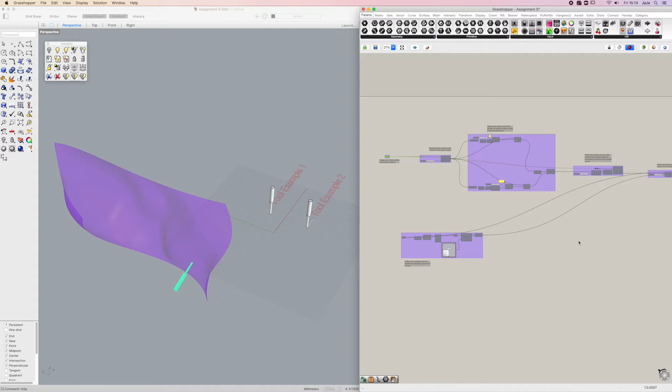If I want to show you very quickly here, this is our freeform surface that I just modeled in Rhino. I can show you, for example, you can always change it. Let's say if this is the surface you want to work with and you're satisfied, then you can always edit it, hide it. This is your design.

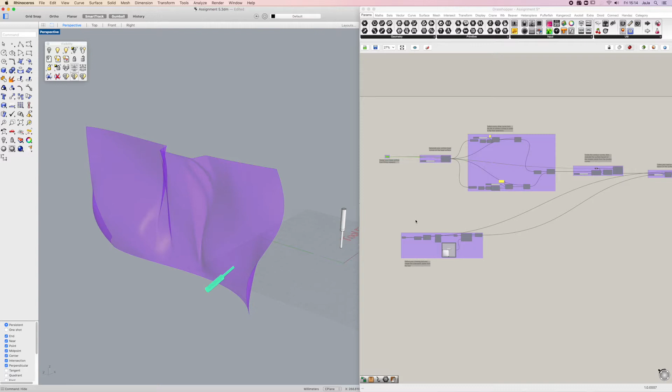And here we have also another component that we call the tool. It's a geometry that is also made in Rhino separately. You use that in order to produce the shape you want. In this case, the drawing you want on the surface.

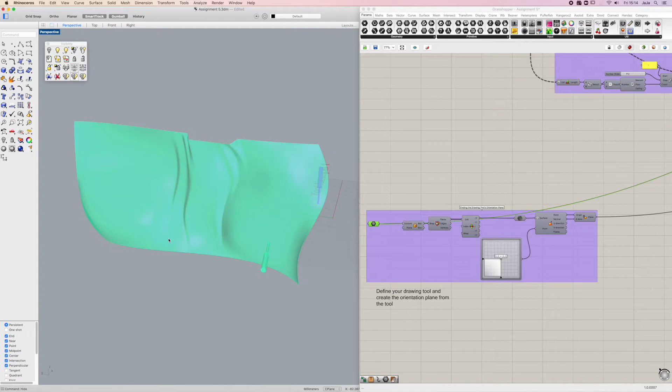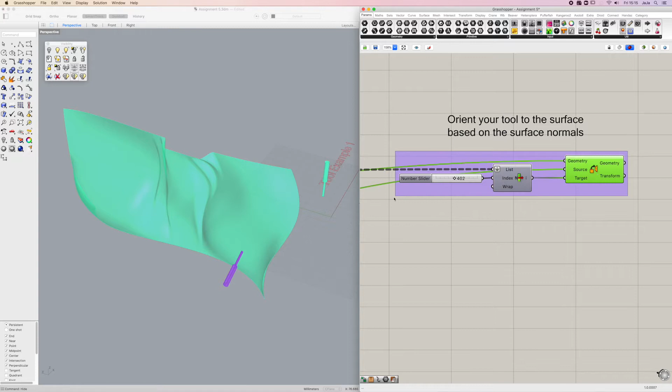We are going to talk about a new component that you're going to learn from this assignment. It's called Orient. Orient is a command in Grasshopper that we use to change the orientation of a geometry or a shape according to a reference plane. So we give the source plane, which is a plane on the tool, and we reorient it into a new location and a new direction based on a given target plane.

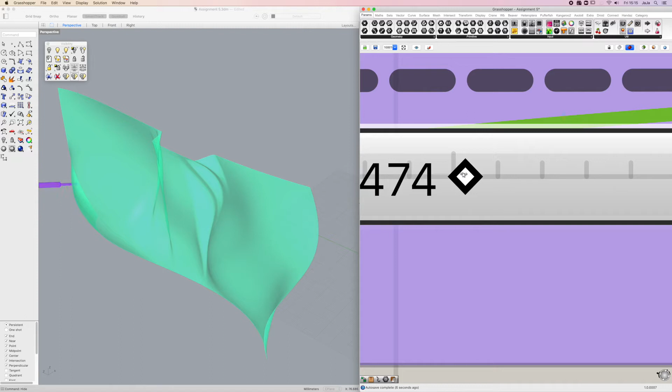That way we can actually start creating that effect of drawing on the surface. If I zoom in here, I have a slider which I can move, and you see that with the slider I'm actually moving our tool on the surface as if it's going to draw the horizontal lines on the surface.

So the step by step to get here, you have to understand that we will have an initial surface and we will have to create the lines that we want to draw based on. Then we extract the points and the planes from those curves on the surface, and we use those planes as a reference for guiding our tool on the surface.

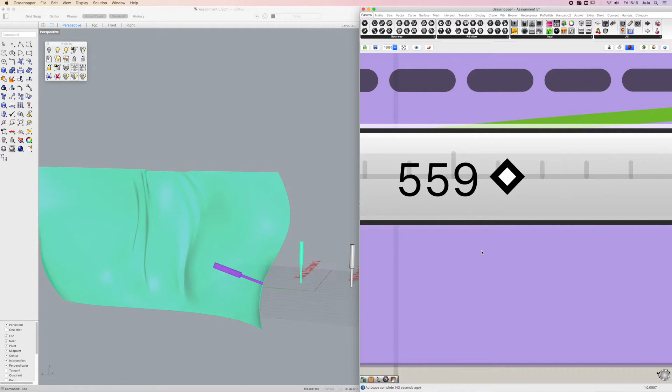Later, this will be the frames and the planes that you give to the robot to move around, and based on the dimensions that you have defined for your tool, you can produce your design.

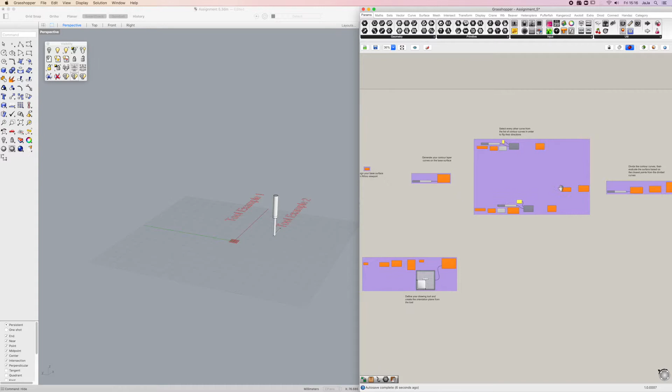So I'm going to open up the file that I have uploaded on the wiki. Here all the wires from the components are disconnected, and that's on purpose, of course. I'm going to explain how we have to use the components in order to create an assignment.

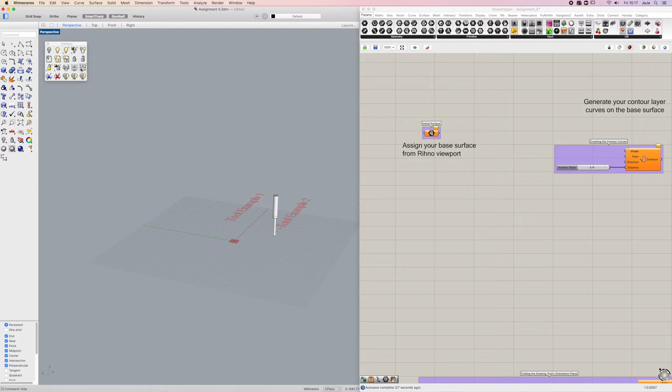So first of all, we need our initial surface, which is the design that you have, for example that freeform surface. I have it hidden in Rhino, so I just have to press it to bring it back. I also have my tool here.

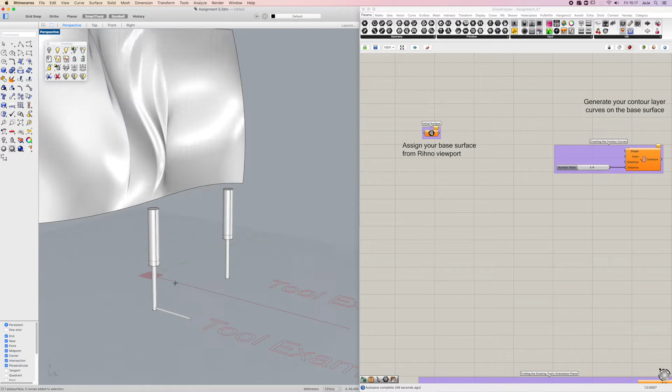So I want to start with the first tool, and then I also have another tool example intentionally to also explain how different shapes of tools require different orientation planes and reference planes that you can use on the surface. Imagine if this tool is a straight axial tool, which could be like a

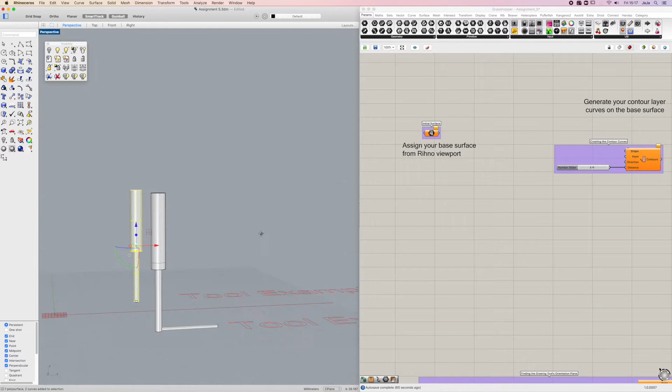marker or a milling bit. You would have one reference plane that has one vertical, for example, orientation in the Z direction, the normal direction. But whereas on the second tool, you will see that it looks like an L. So the shape is actually changing here with the orientation, and we will have to give a different plane as the reference, which would have a different direction of the normal plane.

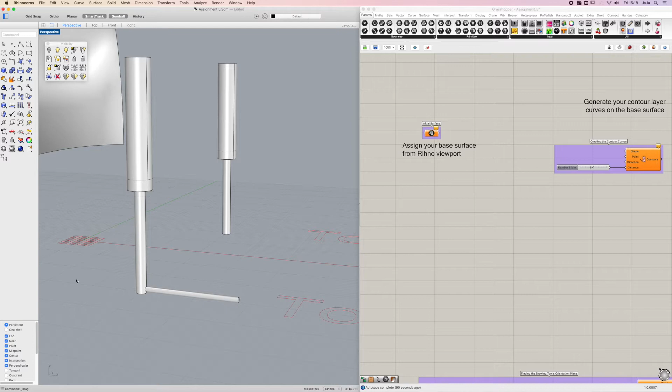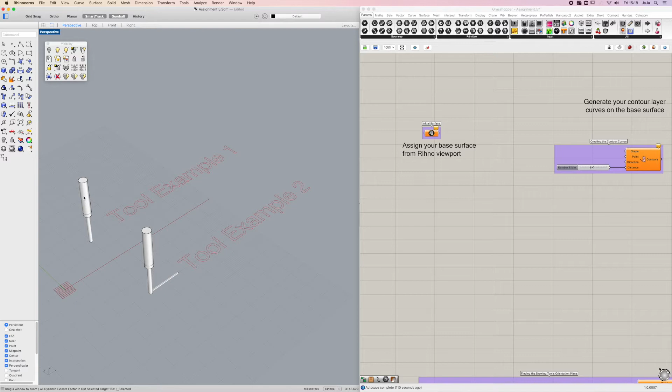Instead of vertical, you would see that it will be horizontal. I'm going to go further and explain later, then you will see the difference between these types of tools as examples. And we know that there are countless different tools and end effectors that later we have, and we have to find out what are those tools as reference planes that we have to use in order to define for the robot.

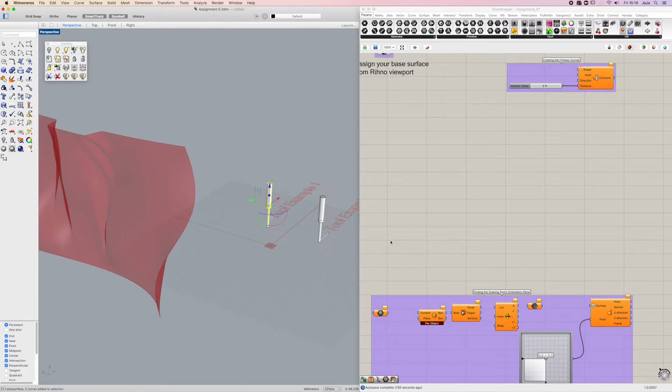I assign it from the Rhino to Grasshopper. That's the first step, of course. The second step is that I want to define my tool, which in this group of components here, I can assign my tool into the geometry component.

So after defining the tool in Grasshopper, it's very important to find the tool's orientation plane. And that's what we're doing here. I'm going to do it separately, up here, so you can actually follow.

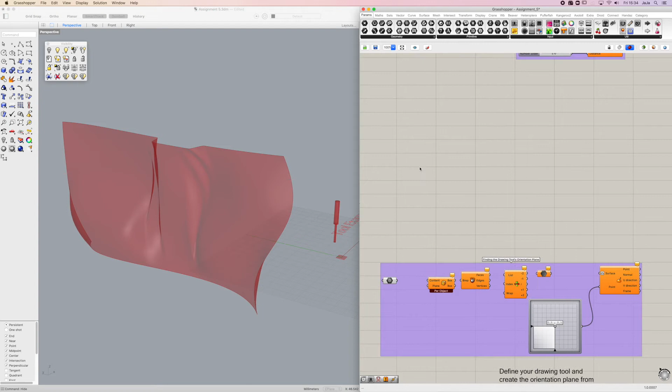I'm going to extract the plane, the reference plane, from the tip of the tool. And if you pay attention, the tip of the tool is some horizontal surface. And I will end up with a type of plane that will give me a vertical normal from that surface.

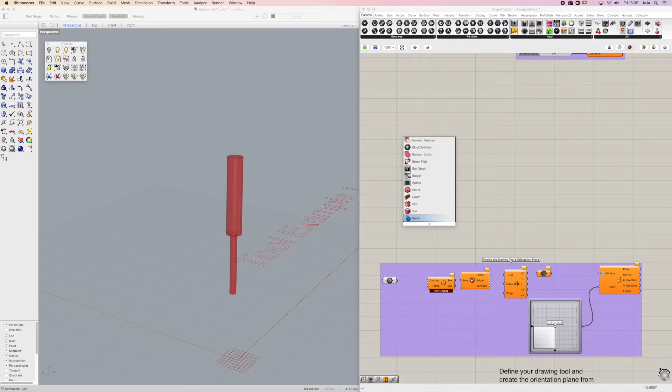One way to do it is that if I create a box around my tool with bounding box, and explode my box into single surfaces. To do that, I can use deconstruct brep, and I would end up with having a box with multiple faces, exploded into multiple faces, lines, and vertices, which are the points.

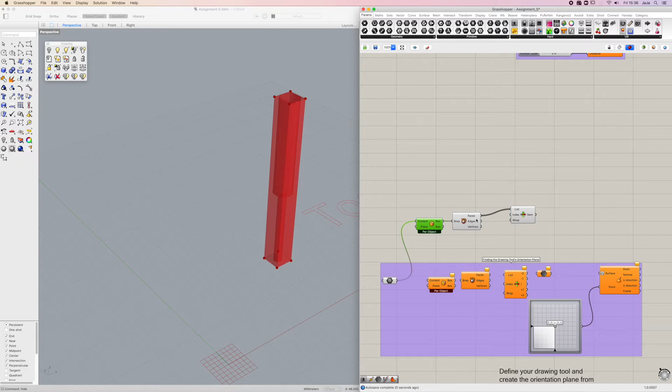I know that I would end up with 6 surfaces, and I have to just select which one of those surfaces will be the bottom one. So I would find that specific item number index from the list of 6 surfaces. I can preview this off so that I know the first surface is the one that we don't need. So I'm gonna make a slider from 0 to 6 to look for it.

And it will be surface number 4. This is the surface that we want to work with, to extract the parameters such as plane and center point, etc.

It's very important to know that we want the center point of this surface to extract the plane from, because we want to find the center point from the tool mathematically. So I would use that surface to evaluate a certain point on it and use the frame out of it.

This is exactly the same as the previous assignment. If you've done it, we use evaluate surface. It gives us the point, the normal direction, UV directions of the surface, and a frame, which will be the plane that we would use as a reference here.

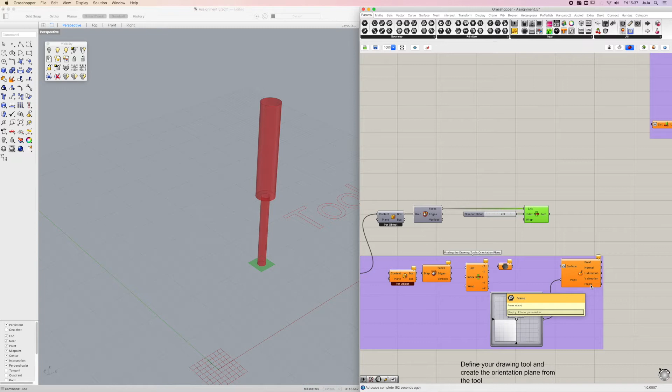So I will make sure to reparameterize the input for the surface, because reparameterize, as I also explained before in the older tutorials, would create a domain on the surface from 0 to 1.

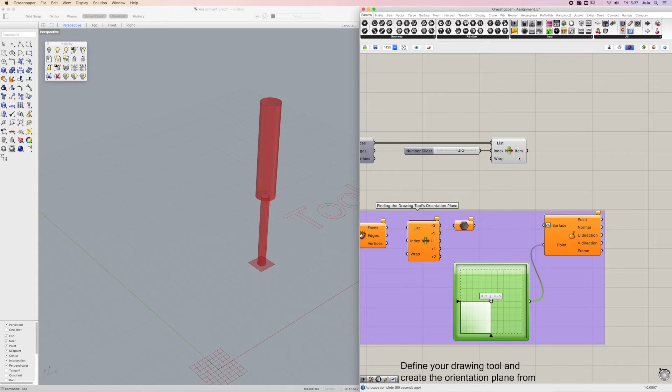And then we can use this multi-dimensional slider to select which area, which point we want to select on the surface. So if I just connect these surfaces on the evaluate, then you will see that it's automatically selecting the center point, because we are having 0.5, 0.5.

If I put it on 0, 0, you know that it will go to the corner, first corner on the bottom. If I put it on 1, 1, it will go to the other side of the corner. So it's basically clear, the direct correlation between the multi-dimensional slider and the point evaluation on the surface.

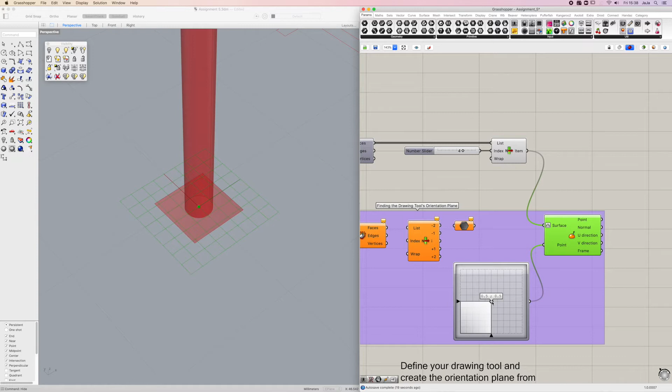So I'll put it on 0.5, 0.5, center point. That will be our tool center point, basically. And the frame that I want to extract will be this plane that you will also see here. That will be the first, the reference point for our tool.

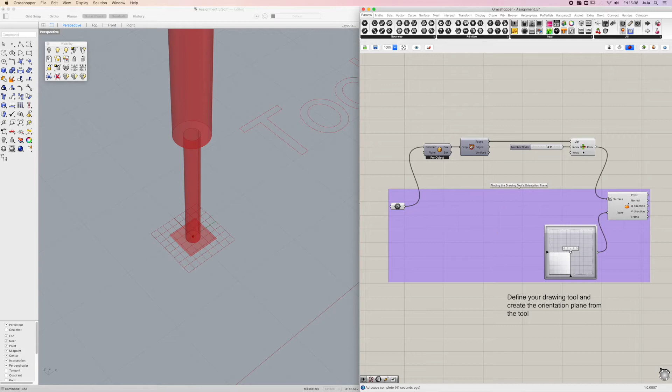So basically, these are why I had these components here. I can delete them and replace them with these ones. So this is defining the tool and the reference point, the reference plane.

Now I go back to my surface again, and this time I'm gonna draw the lines on the surface. I use a contour. It's a command in Grasshopper that allows us to draw horizontal lines, parallel lines, on a certain shape according to a direction.

And the lines distance between them could be also predefined as a different parameter here, as you see, for example, number 5, in order to control the number of lines we want.

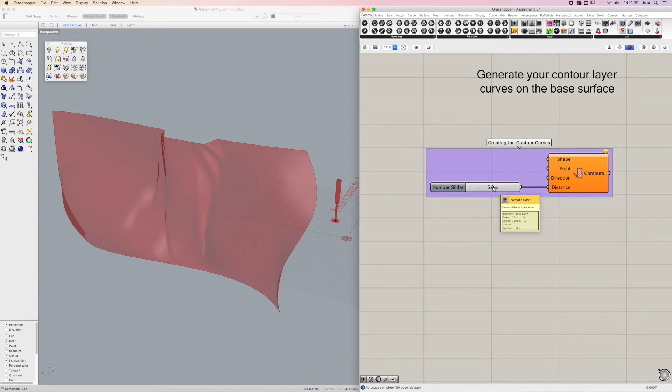I type contour, C-O-N, contour. It creates contour curves. This is also the same command that exists in Rhino as well. But here in Grasshopper, you can just control it parametrically. So I connect my shape to the surface.

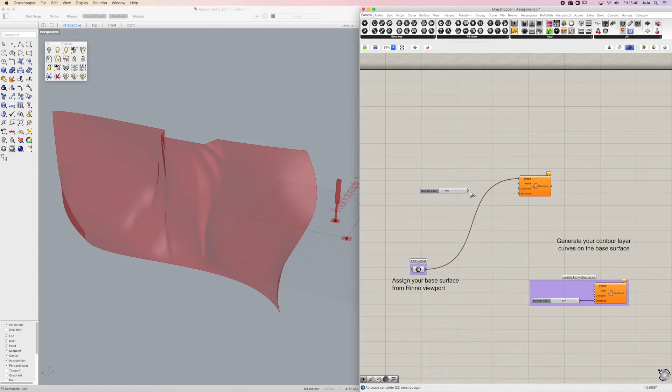Then the direction, I can always define any direction I want, but in this case, the direction is just a z vector because it's 0, 0, 1, so it goes on the z direction upwards. And the distance, I want my curves to be made from distances of 2 millimeters. So I just give them 2.

And then you'll immediately see that there is a bunch of curves, a series of curves made on the surface. If I change 2 to 3, I would end up with less curves because the distances are more, and therefore will be less curves fitting on the surface.

So the output from the contour will be 39 curves.

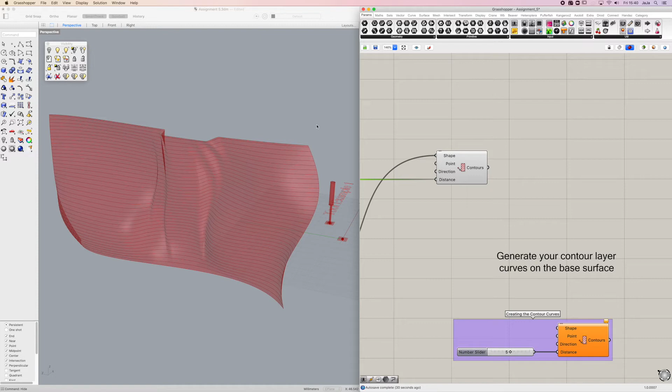I want to make sure that all these curves are following the same direction. For example, the first curve starts from the left to the right, then from the right to the left. The second one follows the same direction, and so on. So all of them have the same directionality, which we have to consider if we want our tool to follow a certain direction.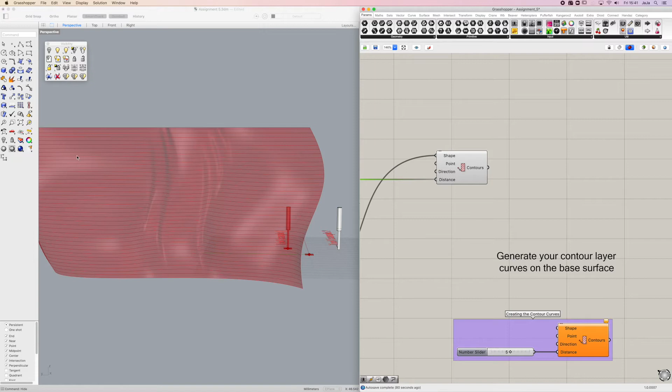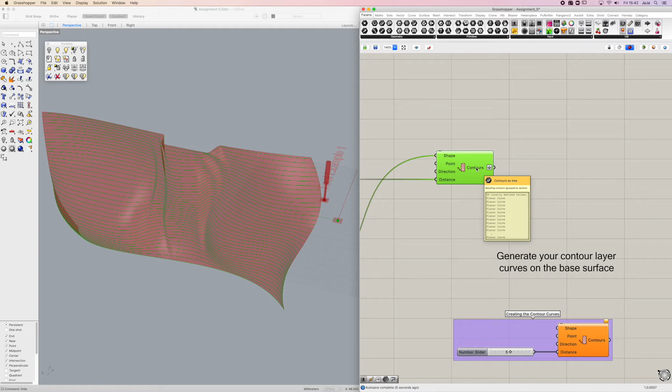So to do that, we have to select every other curve on the surface and flip the directions of those curves, so that the first curve, if it's from right to left, the second curve is from left to right, and the third curve is again right to left, and so on. I'll make sure I flatten this so that I have all of my curves into one list. Then I'm going to select every other curve and flip the direction. That's what we have done here. We will do it here.

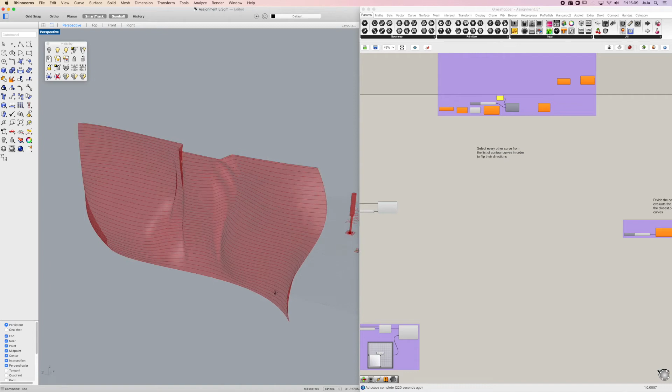I'm going to do it separately so it will be more clear and understandable. I would delete all the in-between components to make it more clear and open space. I want to select every other of these curves and flip their direction in order to actually have the tool going in one direction and at the end going back.

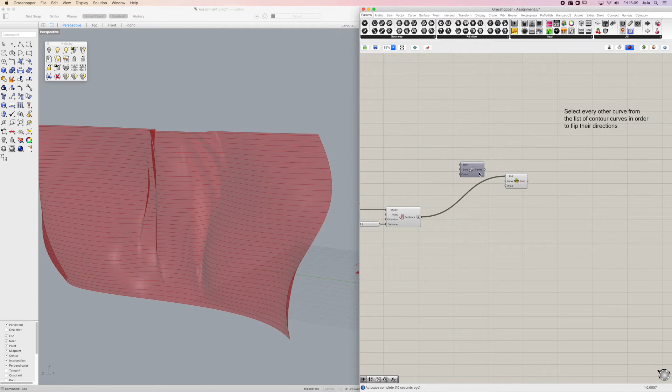To start selecting every other curve to flip the direction, I'm going to use List Item, and I want to make sure that first my data tree is flattened so I have all the items in one list. I connect it to the List Item, and it selects the first one for me because by default the index is 0. But I want to give it a series of numbers, and within this series I'm going to give indications of where I'm going to start and what steps I'm going to take in terms of selection and how many items I should go for.

So it's very important to know how many curves we have in the list first, and to define these inputs for the series. If I already connect the series to the list, it would just select the first 10 for me, because by default it starts from 0, goes in steps of 1, and reaches number 10.

One thing: if you want to start selecting your curves in this direction, List Item works in a way that if you keep going and pass the last number, it starts again from the bottom, and we want to prevent that because we only want to select these curves once. So I want to make sure I wrap the item list, because then all the items will be reached just once and it does not go back in a loop.

So for starting, I'm going to start from 0, and the steps should be 2 because I'm going to skip every other curve. If I select it already, you'll see that it skips every curve.

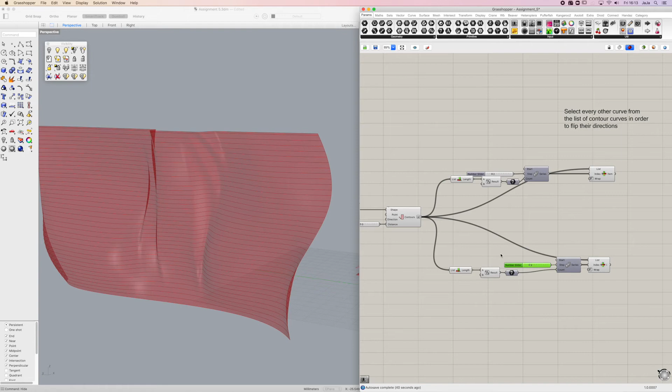In order to do that, I have to make sure that I don't start from 0. This time I would start my number series from 1, and I'll keep the step number again as 2, and give it a count for how many times this has to be selected. But you'll get an error here because it says supplied index too high. We want to wrap this, but there are more items requested than available in the list, so it's unable to provide that number. We had 20 items here as input, which adds up to 40, and that's bigger than 39, the number of available items in the list. Therefore 20 is too big.

We have to make sure that we are actually one less than 20, which is 19. So I subtract 1 from 20 and end up with 19, which can be used as the count. Then it's possible to extract the other set of curves in between. So now I have two sets of curves, and I'm going to use one of them to flip the direction of the curve. This happens by just connecting the output to the curve here. And once I have all my curves flipped...

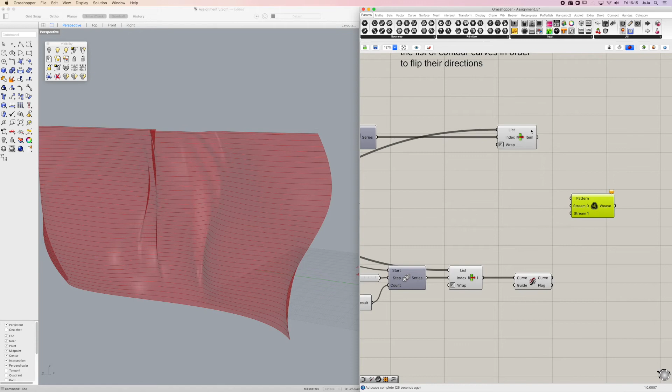Then I'll have to again make the same list with all of my curves in it. For that I will use Weave, this component, also explained before. Weave allows us to mix two lists of items based on a given pattern. Here the pattern is 0, 1, meaning if I give the first list to stream 0 and the second list to stream 1, it will weave them based on these patterns combined together. So the outcome should be a list of 39 curves again, but this time every other curve has been flipped.

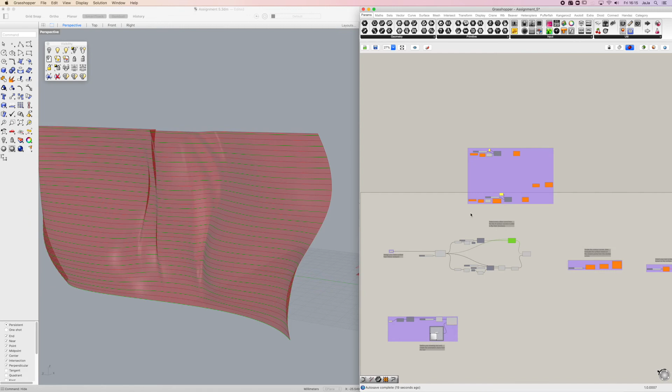This is what we've also set up for you guys here to do.

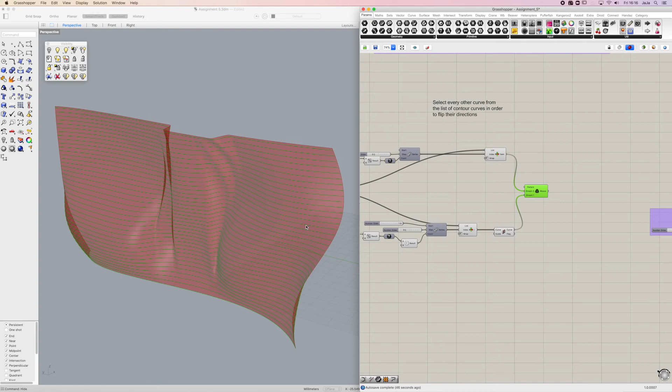So the output curves here, I'm going to use them to extract the planes and frames from these curves on the surface. We'll use again the same components as before, the Evaluate Surface and Extract Planes, and then we can use those planes as targets for the tool.

But before that, we have to know at which locations we want those. We want those locations to be on our curves, because we're going to draw these curves on the surface. So here is the set of components that will give that to us. I'm going to move it away so that I can explain it separately.

I want to divide the curves, and I want to divide them by length. So I have to specify what the distance will be, for example 3 millimeters. Then I'll get the points on the curves.

If you check the list structure, the data tree structure, you'll see there are 39 branches of data representing the number of curves, and each curve is subdivided by a number of points based on a given length, which is 3 millimeters. So every 3 millimeters there's a point, and that gives us, on every curve, how many points you will have, which is the number of items in each list, in each branch.

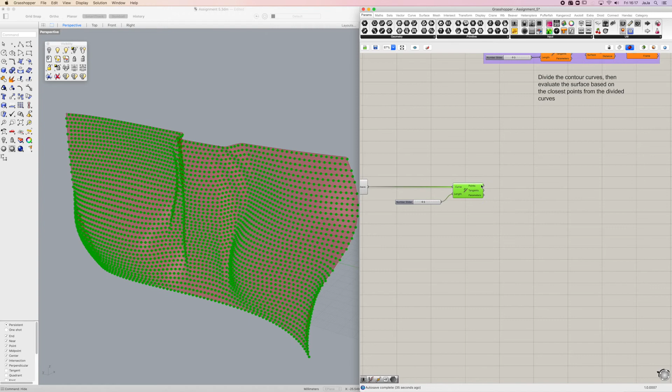So I want to find the locations of these points, which are on the curves, but this time on the surface. So I have to evaluate my surface at these points to be able to extract the frames we need. But if I just connect the initial surface here and give it these points, it would not give us anything, because these points don't yet exist on the surface. They are points on the curves that we divided.

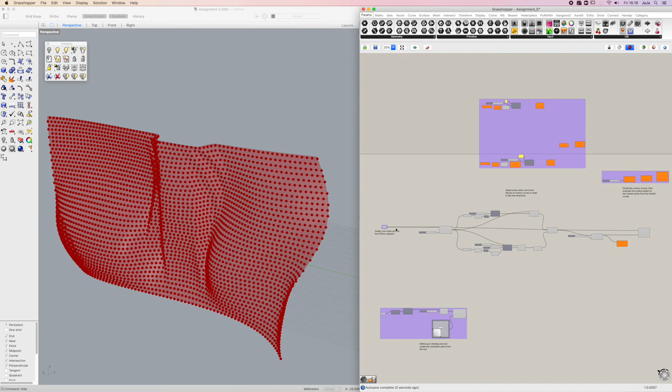So we have to make sure our points are also on the surface before we evaluate their locations from the surface. We have to use a component called Surface Closest Point, to be able to project these points onto the surface. I can use again the same input from the surface we had, and in this component we make sure that all of these points now actually exist on our surface.

So I will just unpreview the subdivided points on the curves, and here I have three outputs: the exact points on the surface, their distances from the initial points we gave them, and then the UV coordinates of the points on the surface.

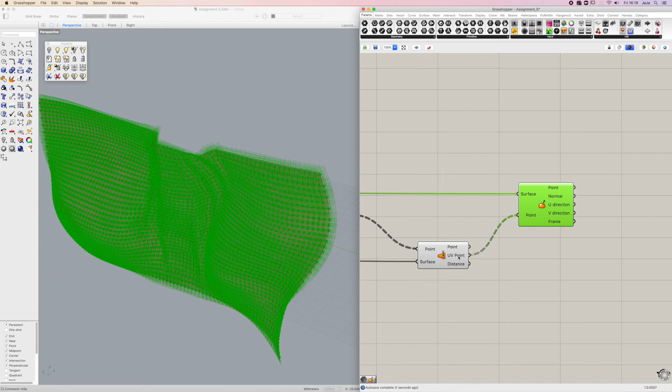This is what we want to use as the input point here, because we want to make sure what the UV coordinates are that we want to evaluate on the surface. If I give this input here, I would end up having my surface evaluated at these certain locations.

Now I can use the frame on every location as a guiding and target frame for the tool. That's what happens in the last part.

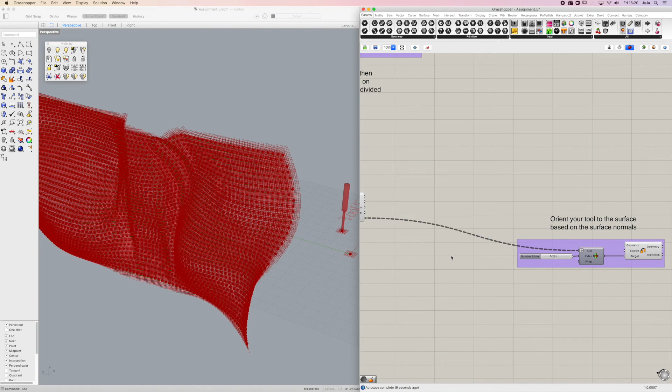So if I connect my frames to the list here, which is the list item, I can select which specific plane I want to showcase, to show the tool on the surface at which specific plane, and then use these planes as a target to orient my tool.

So I have the information from my tool over here, which is the source plane from the frame evaluated on the tool. I connect it here as a source, and then the geometry to evaluate and orient, and that geometry is the tool that we created in the start.

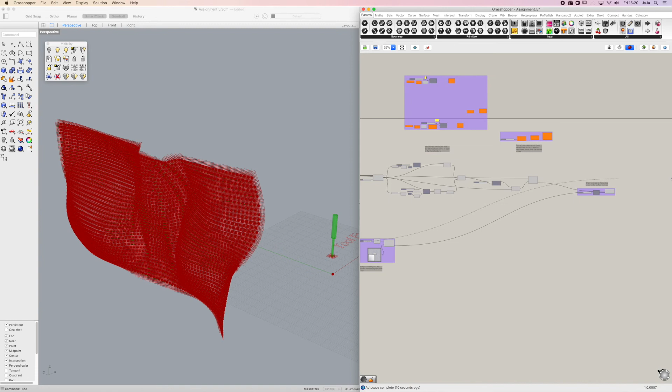So when I do that, if I select the orient component, it gives me the geometry, which is my tool, but this time oriented on the surface. This orientation is based on these guiding planes on the surface that we created over here.

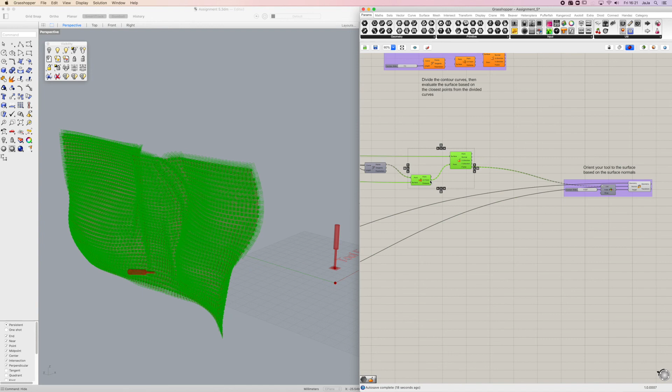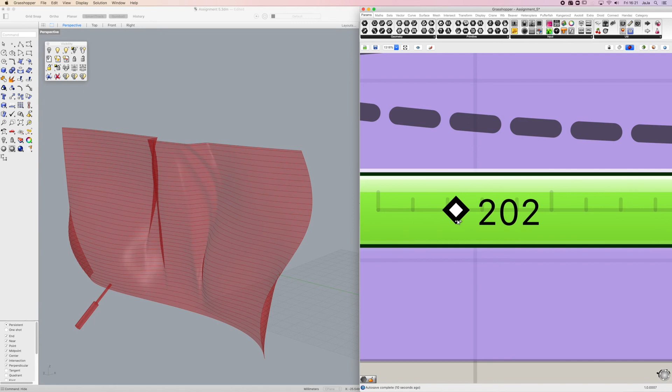I can preview these off, so then I will see my surface. With this list item and the slider, I can select at which specific location of my tool. If I just give it from 0 to the last number, it would follow the same path that we defined on the surface.

This could be what you actually give as a script to the robot to later draw on the surface for you, or mill out the shape from a block of wood, or for example a solid.

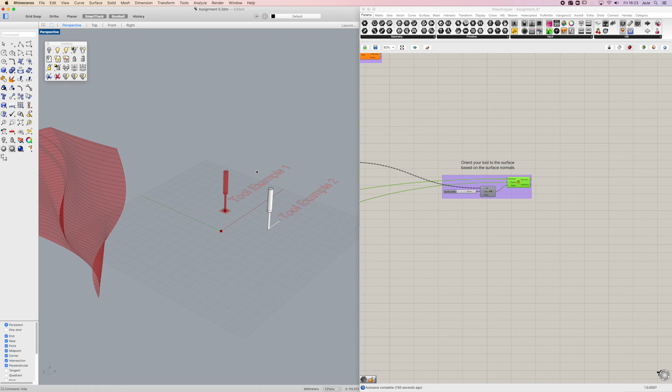Now that we have experimented with the tool example number 1, I'm going to also quickly do a tryout with the second tool to see the differences. So I want to make my second tool here.

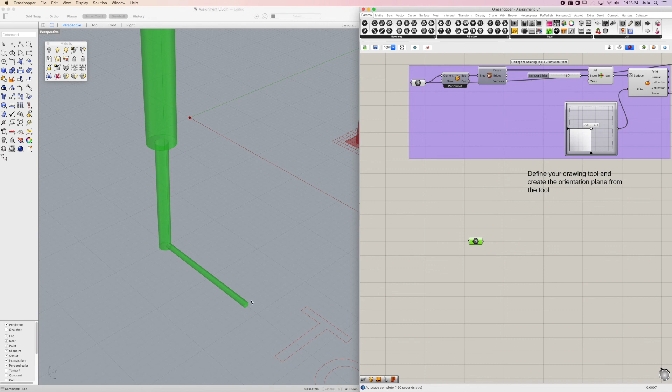I'll just assign it as geometry back to Rhino, and I can hide it. It's very important to know that we want to use a different reference point to define the orientation of our tool. Something similar to what we've done up here, but this time it's a bit different because the orientation is changed.

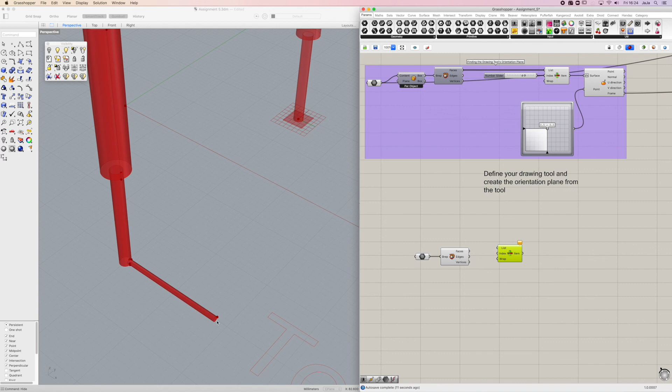So I would explode my tool with the BREP deconstruct, and I would end up having my tool exploded in multiple faces again. This time I want to make sure that I select the tip surface at the end of the tool.

So if I give my faces into the list item, then this time also from 0 to, it seems, 7, I can look for it. Here it seems just the number 1 is the one that we need, so that's easy.

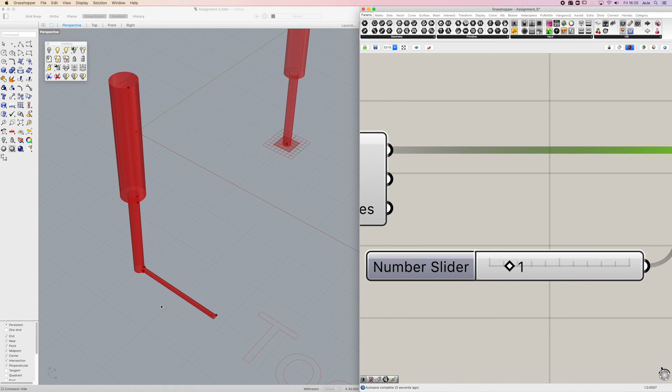I can hide the exploded BREP. So this is the surface that we're going to use to evaluate and create the center point and the frame again. I can copy paste the module from the top, and instead I would assign the new surface.

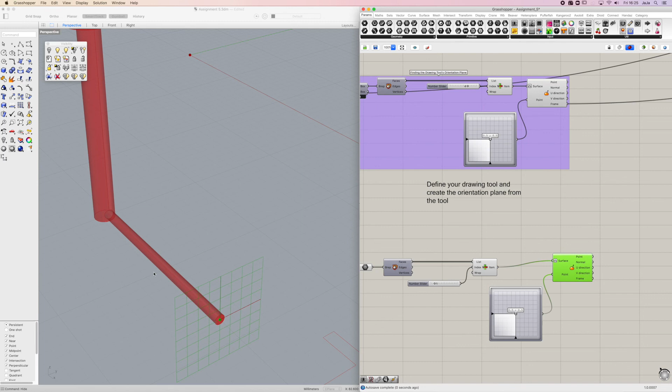So now you see that yes, that plane is now created for us. This plane is more vertical, whereas the other one was horizontal, so it has a different orientation. It will be nice to see the difference if I want to use the new tool instead.

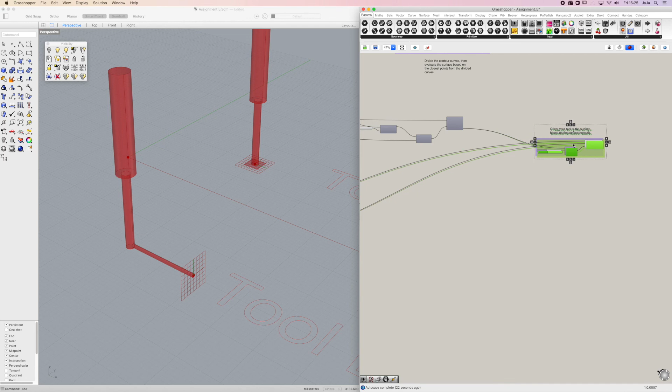I can copy paste the end again, I will turn the preview of the older one off. So if I go back on the surface here

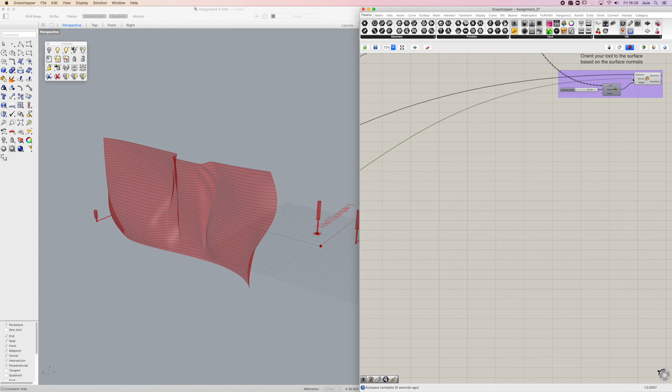and I change the geometry input for the tool with the new tool, I also have to give the new source from the new plane of the new tool source plane. Then this way you will see that the tool orientation is this way, for example.

This is if you imagine that we have different types of tools that we can use, and for example one of them could be L-shaped, and it's very important to know that every time the center point changes and you have to define it.